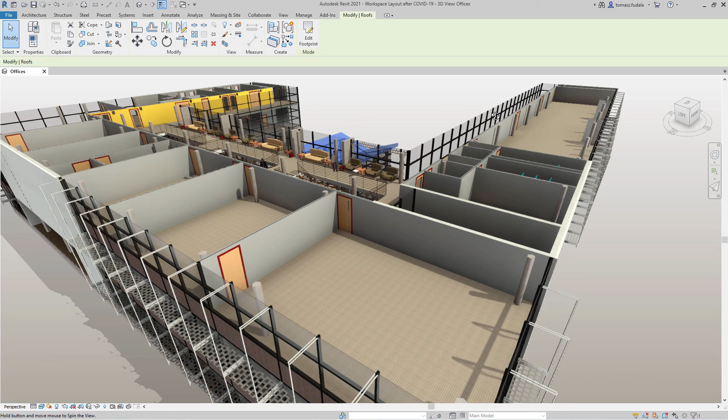One of the many challenges facing employers as they begin to repopulate their offices is the need to maintain a safe physical distance between employees.

Using generative design in Revit, let's consider this basic problem: how might you configure an open office environment with physical distancing in mind? Your goal is to ensure that your employees maintain a minimum distance of 6 feet from each other.

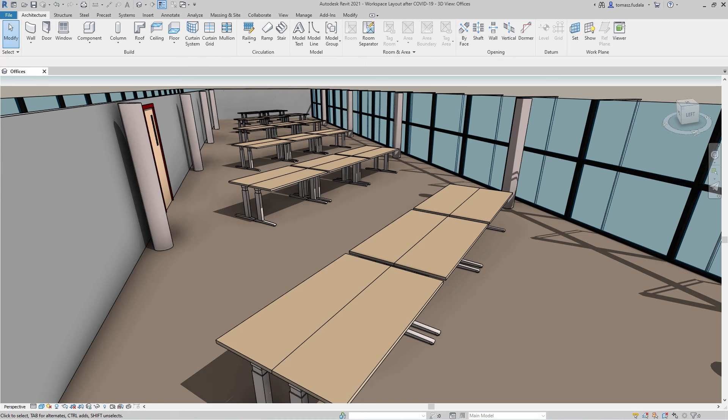As for constraints, you need to accommodate 32 employees at standing desks. Glass panels may be attached to those desks to enable back-to-back placement, and ideally, you would like to be able to use the 2 operable partitions installed in the open office.

With these inputs, you will consider several approaches using generative design.

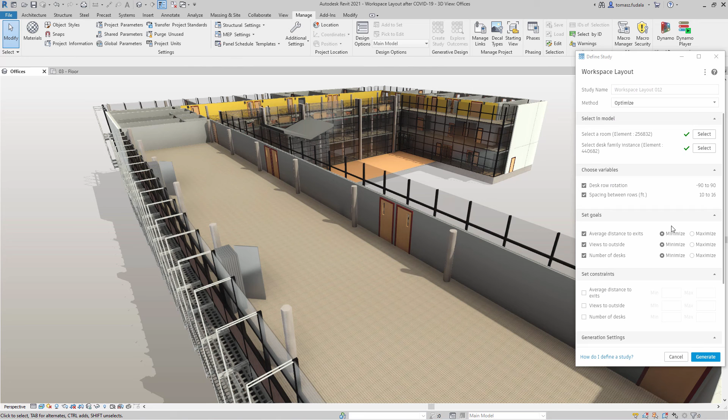First, the workspace layout study is used to group the desks, and glass panels are installed to protect employees. You find a result in which desks are grouped together to fit 40 employees, positioned at an angle in the space.

But the angled layout might not be ideal, and one of the partitions is obstructed.

A second approach uses the grid object placement study to arrange desks along the length of the office. Here, you find that groups of 4 desks with glass panels work well for up to 56 employees. But you're concerned that this layout makes the office feel uncomfortable, with half of the employees facing away from the windows. And as before, one of those partitions is obstructed.

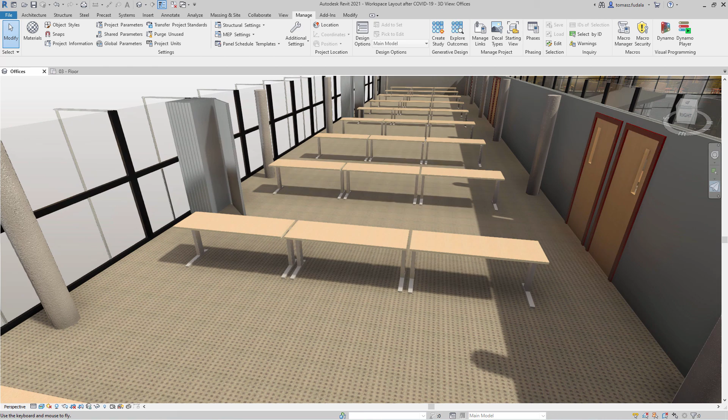For the next approach, you configure the same study to place the desks such that they are perpendicular to the windows. This layout accommodates 33 employees in groups of 3, and both operable partitions are functional. Now you're getting somewhere.

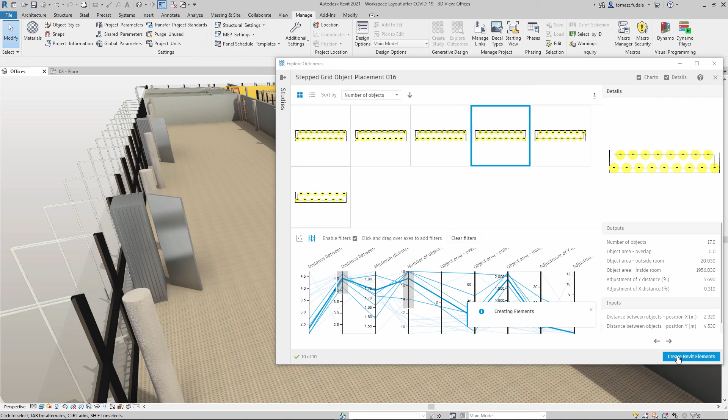However, you'd still like to see more spacing between desks before removing those glass panels. You try one more approach, this time using the stepped grid object placement study to arrange the desks with the same orientation as before. You find an optimal solution for 32 employees in groups of 2. The layout ensures maximum spacing between employees, and both operable partitions are functional.

You've done it. Without manually moving a single desk, you've discovered the optimal open office layout to safely accommodate your employees using generative design in Revit.